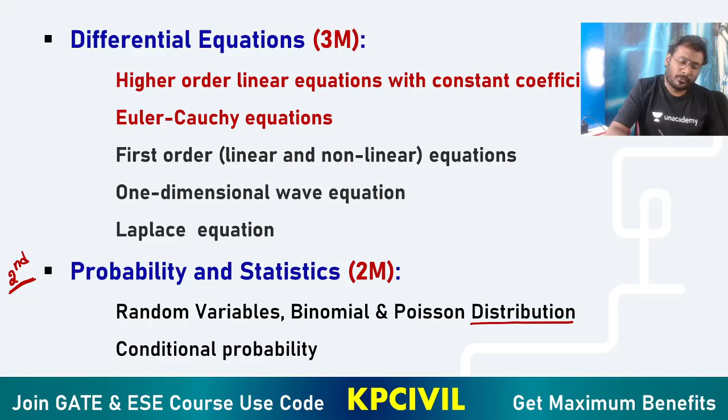Followed by your third priority in mathematics, differential equations. Higher order linear differential equations with constant coefficients, YC and YP determination. Higher order linear differential equation with constant coefficient, YC and YP value determination. Focus more on this.

Euler-Cauchy equation, one-dimensional wave equation, Laplace equation or Laplace transformation. But more priority is given to YC, YP, and then Euler-Cauchy equations. After that, you focus on the remaining topics.

Linear algebra: 1 mark question, 1 two-marks question we are expecting. Systems of linear equations, very important, focus more on systems of linear equations. Eigenvalues and eigenvectors.

Followed by numerical methods, a very small topic, but surely you will get 1 to 2 marks: Newton's and Lagrange polynomials, integration by trapezoidal and Simpson's rule, Euler's method. So this is your fourth priority, linear algebra is fourth priority, numerical methods is your fifth priority. In this order you need to finish.

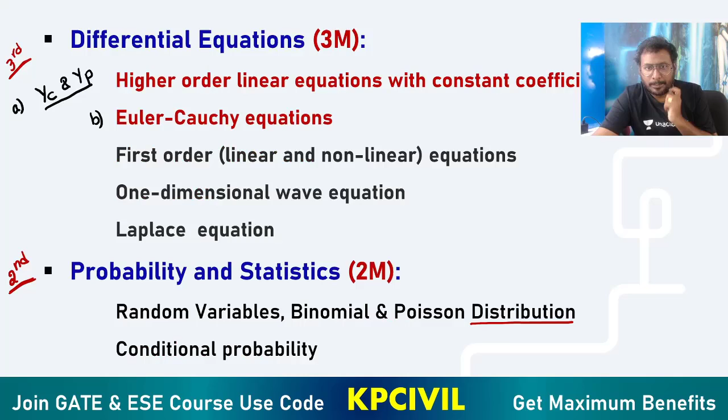Still, if you have time, try to complete 100% of the syllabus of mathematics. Again I am repeating: your first and foremost priority is calculus, followed by probability statistics, then differential equations, linear algebra and numerical methods. If you still find more time to spend on engineering mathematics, finish 100% of the syllabus, no worries, because engineering mathematics is foundation and basic, which helps for the other subjects also, and sometimes they will give questions from it directly. So try to complete the full syllabus of engineering mathematics. Weightage is very high because it is 13 marks.

Okay. Then geotechnical engineering.

Geotechnical engineering, we are expecting 14 to 15 marks, but minimum you will get 12 marks at least. No doubt about it. It's the most preferable core civil engineering subject, without which you are not allowed to write the gate paper, because that much weightage it has. You may write the gate paper without knowing geotechnical engineering, but you'd leave 12 marks. Is it okay to leave 12 marks from such an important subject?

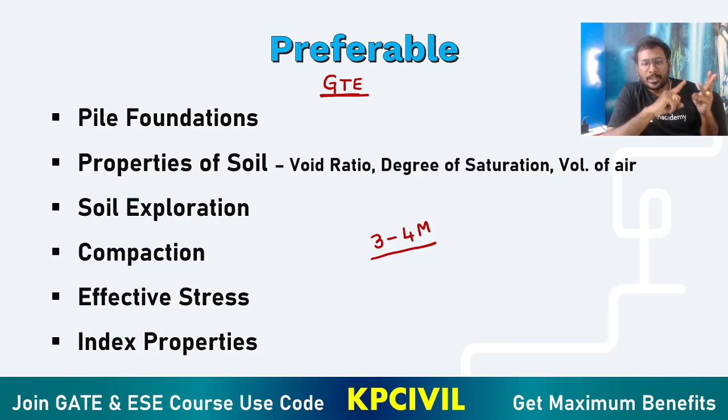From this slide, 3 to 4 marks come from pile foundation, property of soil, soil exploration, compaction, effective stress, index properties.

I want to make your preparation for gate perfect. So for each and every topic related to soil mechanics, I have given their priority here - most preferable, and for the remaining, just go through the outlines. I am saying don't leave anything in geotechnical engineering, soil mechanics - it's very important.

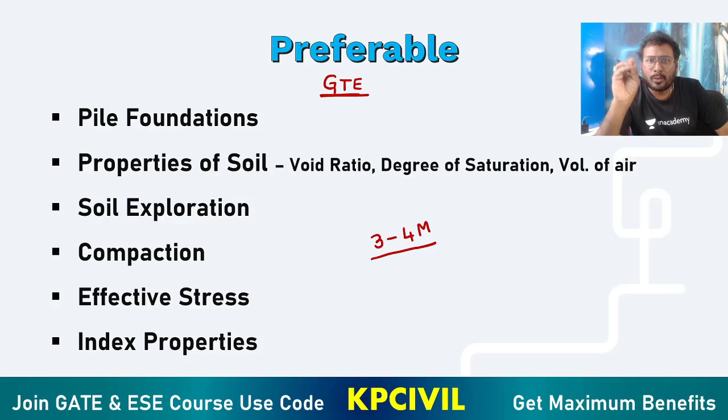But your focus must be more on slide 1, then also focus more on slide 2. For the remaining topics, at least go through them once - learn the important formulas and outlines related to them. Because getting 14 to 15 marks is not an easy task. It is not easy. So according to my analysis of the previous gate papers, I have given the order of priority.

So try to complete the full subject of geotechnical engineering. If that's not possible, at least focus on slide 1 and slide 2.

Environmental engineering - 10 marks minimum. We may expect 11 or 12 marks also, but 10 marks at least will come for sure.

Coming to environmental engineering, air pollution is most preferable. When you observe recent GATE papers from 2011 to 2020, even 2015 to 2020, you get 3 to 4 marks from air pollution. So at least minimum you will get 2 marks - every time one numerical question is mandatory, we are expecting from air pollution.

And regularly, theoretical or numerical questions come from quality of water. Quality of water is very vast - we are teaching 20 to 25 hours on quality of water. What you can focus on: from quality of water, focus on hardness, alkalinity, pH, solids.

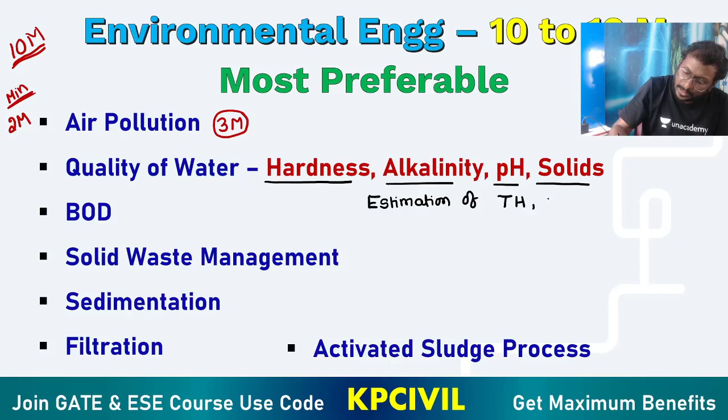You know numerical questions related to estimation of total hardness - write that down, it's very important. Estimation of total hardness, total alkalinity, carbonate hardness, non-carbonate hardness - these are very, very important related to quality of water.

Now coming for BOD. BOD at one temperature and one day is provided, and you have to estimate BOD at another temperature and another day. For example, BOD for 7 days at 25 degrees Celsius is given, and you need to convert it to BOD for 5 days at 20 degrees.

Or they will give you initial DO and the final DO, and you need to estimate 5-day BOD, ultimate BOD, BOD remaining, BOD consumed, like that.

Most important, these 3 topics we focus on more, very very important: air pollution, quality of water, BOD. You must understand these very well.

And this time GATE is conducted by IIT Bombay. When you analyze previous IIT Bombay papers, match the following questions they are giving, so theoretical questions as match the following. You understand the depth of subject they are focusing here - theoretical conceptual knowledge of environmental engineering. You must have conceptual knowledge related to environmental engineering.

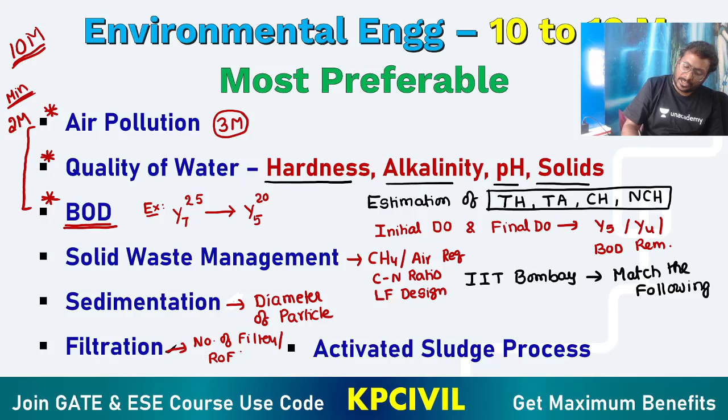Filters - number of filters, focus on determination of number of filters, rate of filtration, filter hydraulics. Focus more on this: number of filters determination, rate of filtration, filter hydraulics - you must focus more.

Okay, activated sludge process theory, mean cell residence time, theta c calculation, food to biomass ratio - very important from activated sludge process.

So by this slide, very important topics, most preferable topics from environmental engineering: air pollution, quality of water, BOD, solid waste management, sedimentation, filtration, activated sludge.

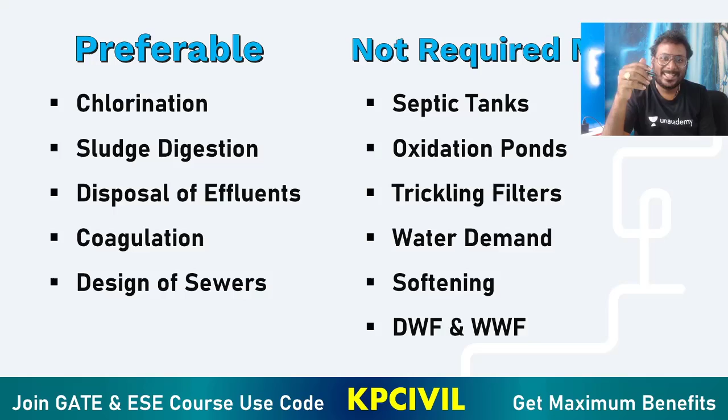Preferable: chlorination. So chlorination will have questions on estimation of bleaching powder, contact period determination, HOCl concentration determination questions, sludge digester, design of sludge digester, effluent disposal, and coagulation - alum quantity, lime quantity measurement, and velocity gradient also.

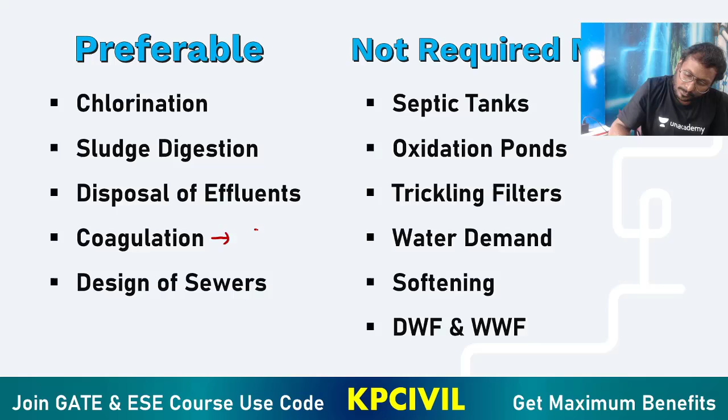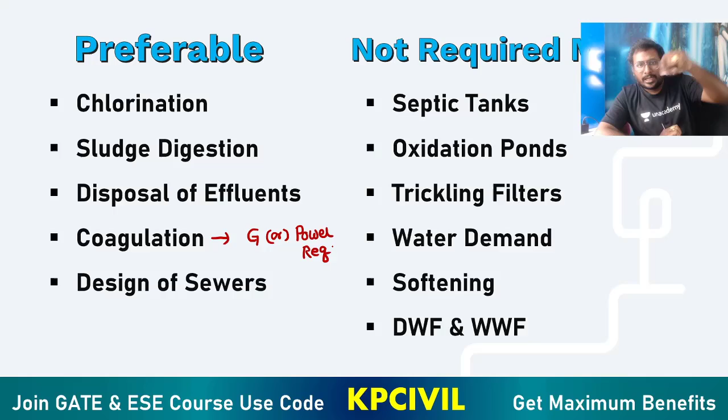G, velocity gradient G, or power required for coagulation unit, power required for mixing operation, diameter of sewer, design of sewer, diameter of sewer needed. All these parameters are important.

Chlorination, bleaching powder estimation, design of sludge digester, effluent BOD calculation, disposal of effluent BOD calculation, velocity gradient determination in coagulation, power input required for coagulation unit, sewer diameter design for design of sewers.

Bluntly I am going to say, no need mostly for these topics what we have written: septic tank design, oxidation pond, trickling filter, water demand, softening, DWF, WWF.

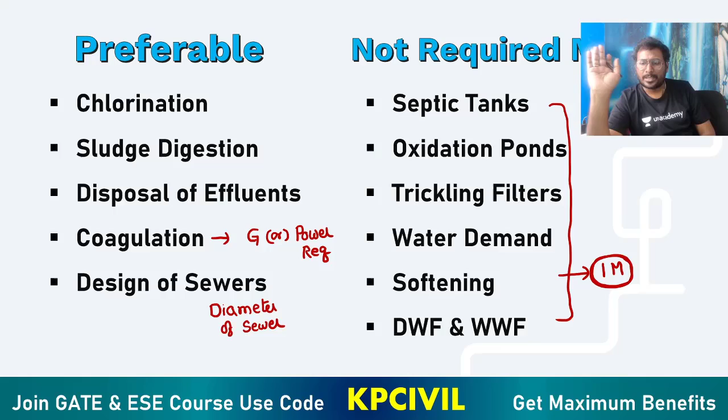If you want 0 to 1 mark, for just 1 mark you are preparing this many topics. Remaining all marks are related to this most preferable and preferable list. So instead of spending that much time on these topics, just leave those topics, no issue. Focus more on most preferable and preferable topics.

Now coming for transportation engineering - 8 marks weightage is given from transportation engineering. Very important in transportation engineering.

SSD, stopping sight distance. In geometric design, the stopping sight distance question is a must, it will come in every paper, very important for you. And horizontal curves - along with that you need to focus on super elevation. In vertical curves you need to focus on summit and valley.

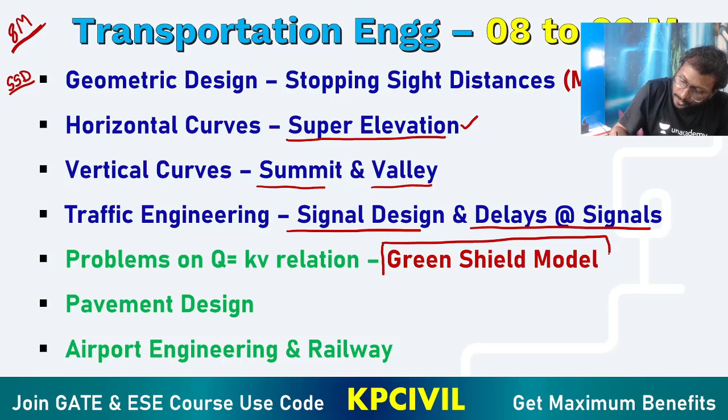Then traffic engineering - signal design and delays at signals, and most important, the Greenshields model. First 4: geometric design, horizontal curves, vertical curves, traffic engineering, and Greenshields model.

If you focus on this, mostly you will get 6 marks. For the remaining 2 marks you focus on pavement design, airport engineering and railways. Clear? Geometric design, horizontal curve, vertical curve, traffic engineering, problems on Q equals KV relation, Greenshields model - 6 marks damn sure you will get. This is as per previous year papers I am saying.

And remaining 2 marks, pavement design - you observe pavement design, you feel you become a good engineer. Airport engineering, railway engineering, tunnel, harbour - the words are attracting more, but weightage in GATE is less. You understand? The words will attract you more, but don't spend more time, because this is a vast syllabus. So don't spend more time just for 2 marks.

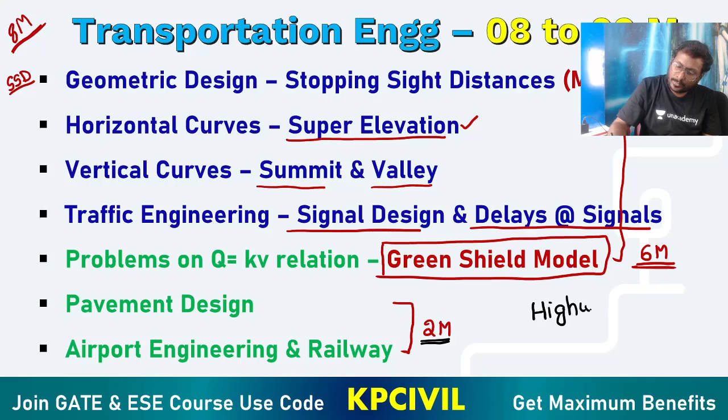So your total focus in transportation engineering, focus more on highway engineering, not on other topics. Spend less time on pavement design, airport, railway, tunnel, harbour. Less time you spend there, but more time you spend on highway engineering.

Then strength of materials. You will have minimum 6 marks, sometimes 7 marks also. Sometimes highest it may give 8 marks, but at least minimum 6 marks it will come. Most of the questions in strength of materials focus more on principal stresses and strains, SFD and BMD, shear force diagram and bending moment diagram. These are mandatory, you will get 3 to 4 marks by reading these 2 topics.

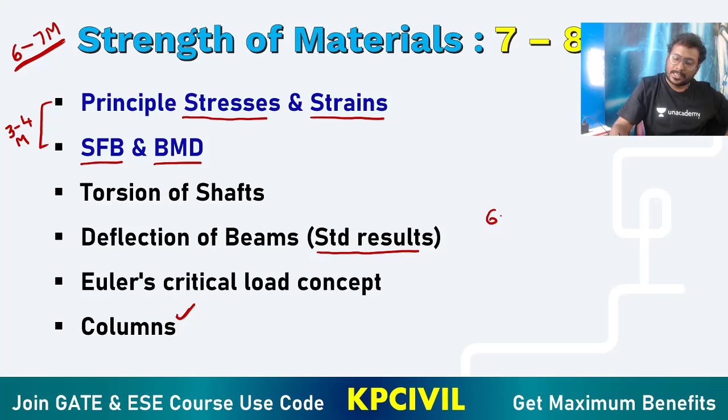Remaining all topics you will get 1 to 2 marks. Mandatory for sure, 5 marks from this slide. That is not by me, this is according to previous question paper analysis.

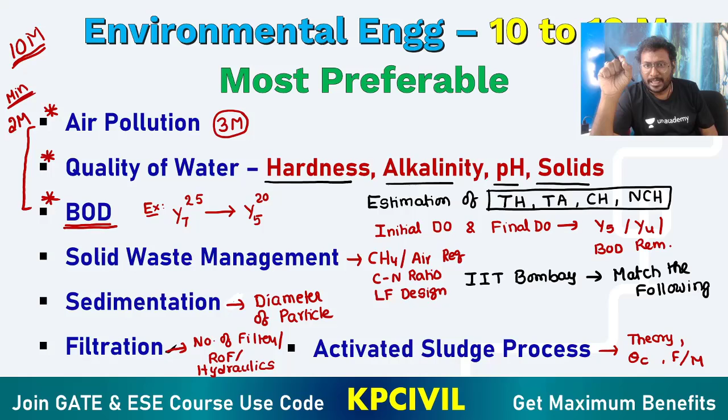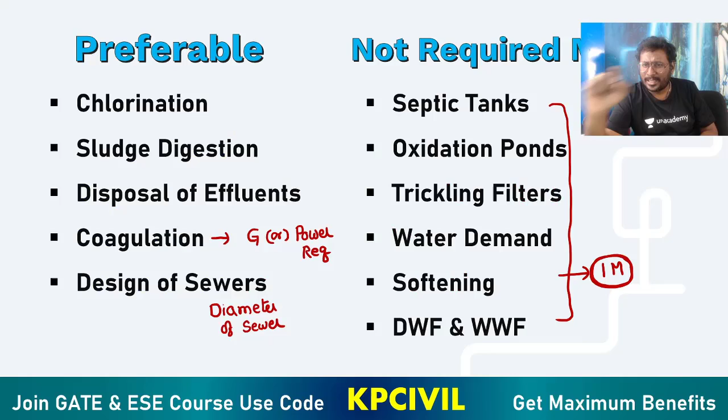Not required mostly topics. Transportation, this slide will give you in total 7 marks. Remaining all 1 mark. This is mostly not required.

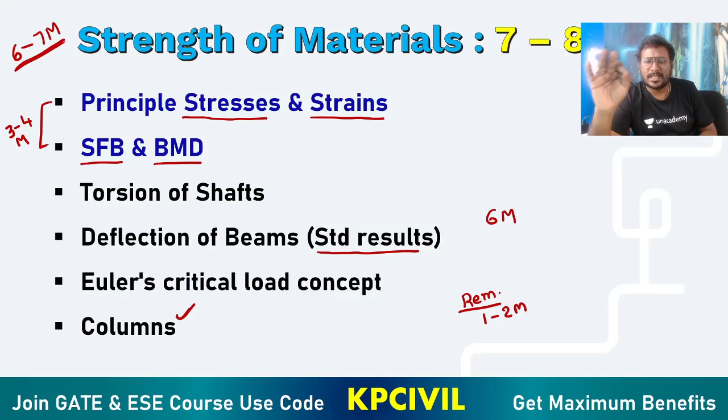Strength of materials, surely this slide will give you 5 marks, 6 marks, remaining 1 to 2 marks only. Same with respect to RCC, 5 marks mandatory from this slide.

Hey, I will challenge you in PUBG. Will you come online to play? No, I have online GATE class, I don't want to miss it. Who is teaching? Top faculty of civil engineering in India, KP sir on Unacademy. I am a big fan of his teachings. Oh yes, I have also heard about KP sir. I am willing to join the class.

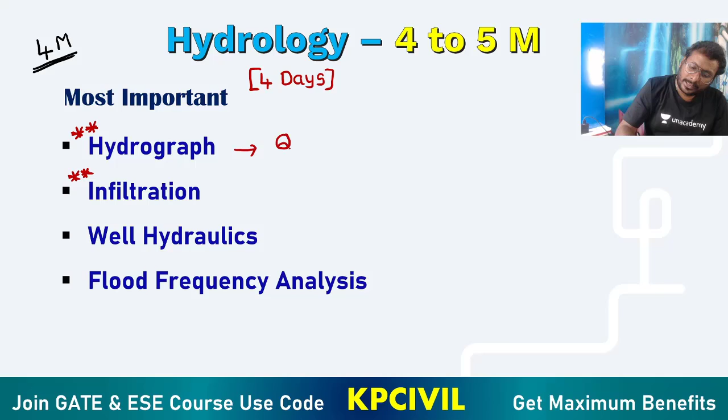Hydrograph, what are you studying? Determination of peak discharge, determination of depth of effective rainfall, determination of catchment area. Mostly your questions are rotating on this - peak discharge, effective rainfall, catchment area determination, infiltration, phi index.

Well hydraulics, discharge or velocity calculation, flood frequency. Mostly you focus on risk associated with the event, probability of occurrence of event at least once, or return period. It is small and simple.

Total you are having 25 to 30 formulas in hydrology. By learning these 25 to 30 formulas, you will get easily 4 marks. Very small and simple subject.

But understanding the concept is needed to solve questions on hydrograph and infiltration. Here in infiltration, you can add Horton's equation also.

Concept-oriented learning is very important for hydrology. That will beat any question related to hydrograph and infiltration. If you understand the concept well, easily you can solve the question.

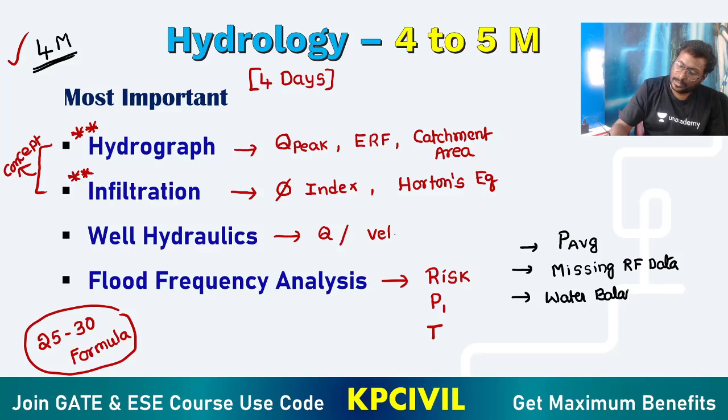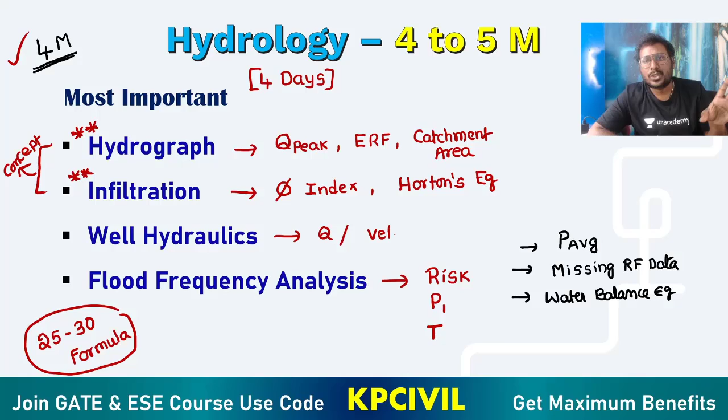So mostly this is enough. Just spend 4 days, you will get 4 marks, no doubt about it. Easy and simple subject. If you learn the theoretical concept, easily you can answer all questions. More days, more time not required.

I have written formulas required in remaining topics - Thiessen polygon method, isohyetal method, normal ratio method, water balance, energy balance. This is regarding average precipitation.

This is about missing rainfall information, normal ratio method. This is completely related to evaporation, potential evapotranspiration, rational formula. Everyone knows it, right? Rational method, AIR by 360.

Muskingum method of flood routing - these are additional. Other than the 4 topics - hydrograph, infiltration, well hydraulics, flood frequency analysis - additionally you learn 7 formulas, just 7 equations, enough. Easily you solve hydrology.

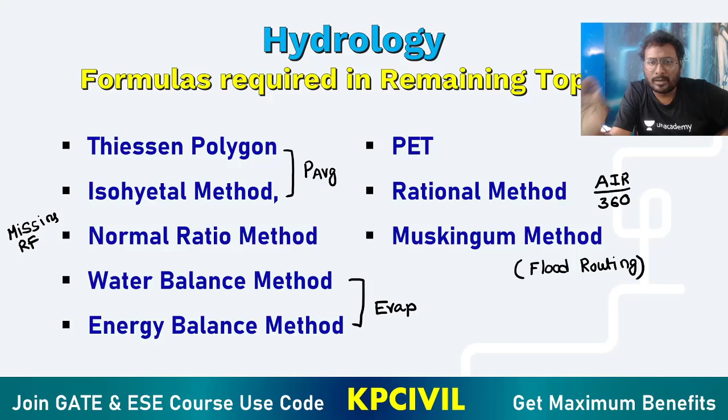Open channel flow. According to me, to prepare open channel flow, you spend 2 days. That is enough, just 2 days you learn it.

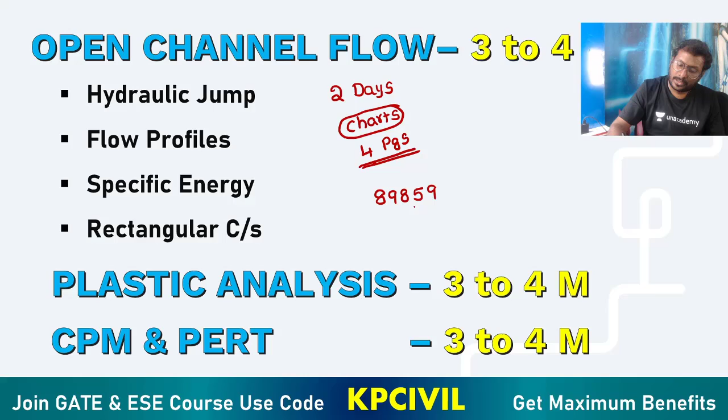89859 3112. I made a simple chart preparation for OCF to simplify it. Mostly questions are from the formulas in the charts, which include hydraulic jump, flow profiles M1, M2, M3, S1, S2, S3, flow profiles, mild slope, steeply sloping surface, specific energy - most important concept in open channel flow.

In channel geometry, we study all channel geometry, but more focus is on rectangular cross section. Along with the jump, you also study regarding surges. Your focus is topic 1 hydraulic jump, topic 2 specific energy, topic 3 flow profiles, topic 4 rectangular cross section. Most of the questions relate to these 4 only.

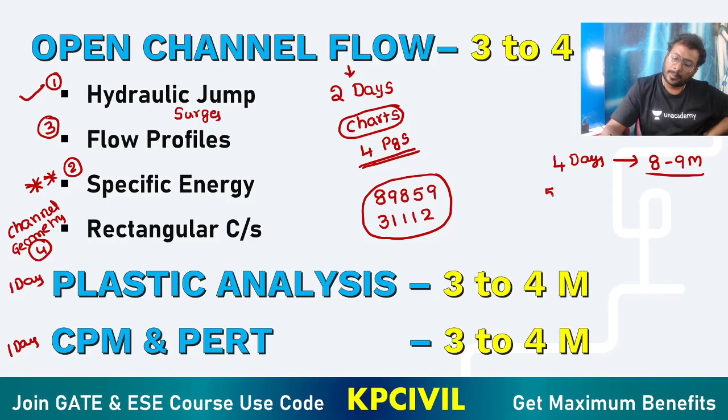Open channel flow, plastic analysis, CPM and PERT - 4 days you are spending. Take 1 more day, no problem, 5 days, no problem. For sure 8 marks you will get. Guarantee, 8 marks you will get.

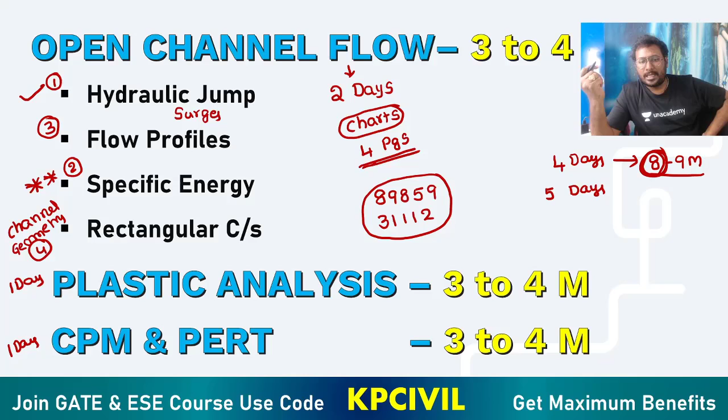Open channel flow 3 marks, plastic analysis 2 marks, CPM PERT 2 marks - 7 marks mandatory will come, no doubt. Simple and easy subjects, easily you learn it. So in CPM, what are you learning?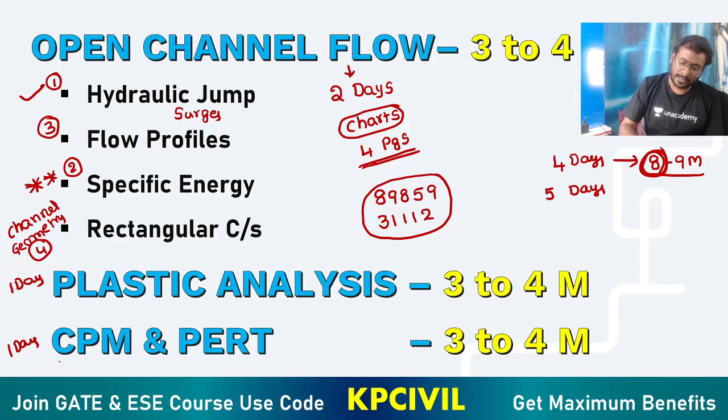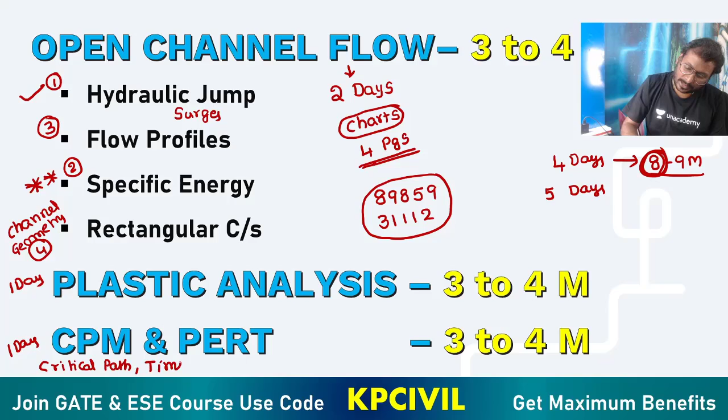Critical path. What is critical path? Time required to complete project, float and slack - these are mostly focused in CPM. Total cost, project total time, critical time, crashing - you have to learn these.

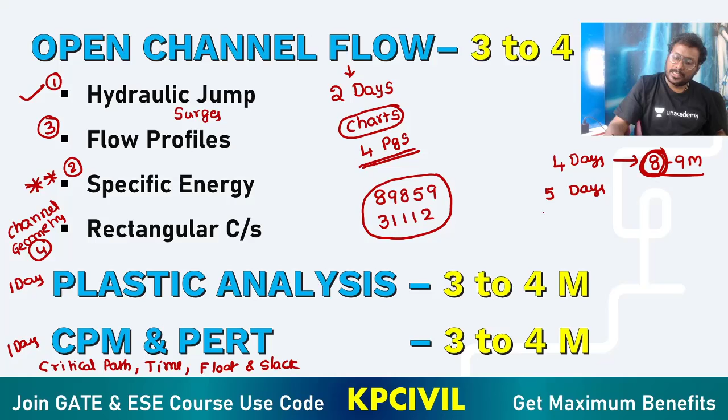Easily you get that. In how many days? Just 5 days, 8 marks. 4 days, 4 marks. So these are small subjects. Surveying - I am giving again 4 days for surveying. Overall, 15 days you are spending.

Hydrology, open channel flow, plastic analysis, CPM part, surveying - 5 subjects, 15 days you are spending. Around 17 to 18 marks you will get within 15 days. See how effectively you are preparing.

Short time, 15 days you are getting 15 marks. Take 15 marks. Every day 1 mark you will get in GATE exam. Very easy na. Coming for surveying.

Focus more and more on traverse surveying, leveling, photogrammetry, elementary height determination, then followed by compass survey and traversing. Here, first focus on traverse surveying, then leveling, then photogrammetry. Along with that, you focus on compass survey.

Errors, you focus also more on error determination. You will get 4 marks minimum from surveying, sometimes 7 marks also. So within this 15 days, you are getting 5 subjects, 17 to 18 marks.

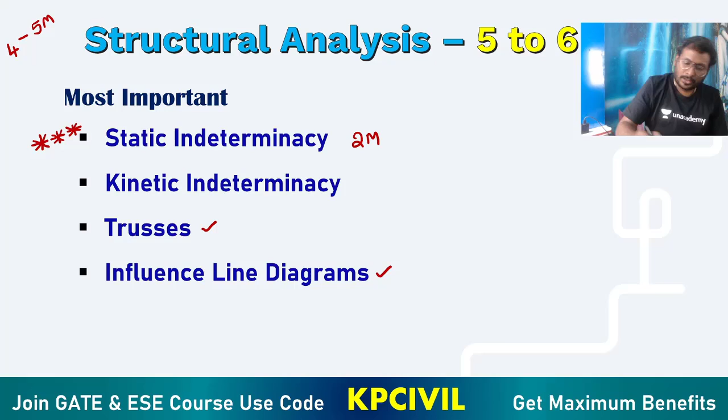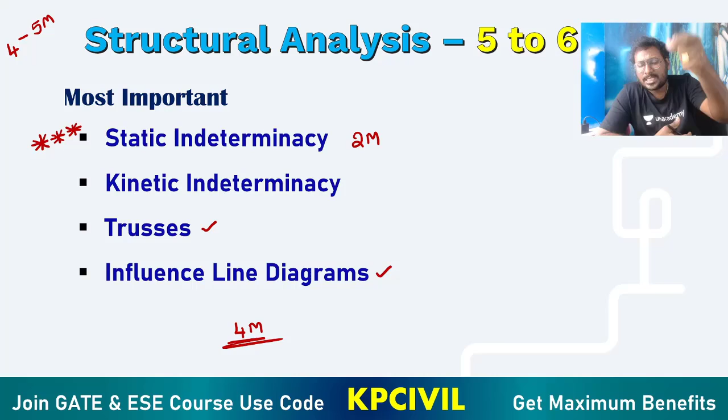Followed by trusses, followed by influence line diagrams. Very important structural analysis topics. If you read these 4 topics, you will get 4 marks. But this is time consuming, so in your preparation, put it in the last stages of preparation, you go for it.

Then fluid mechanics. Already we have taken out open channel flow. After excluding open channel flow, 5 to 6 marks. Fluid dynamics, kinematics, dimensionless analysis, flow through pipes, laminar flow and turbulent flow, hydrostatics - these 3 you will get 4 marks.

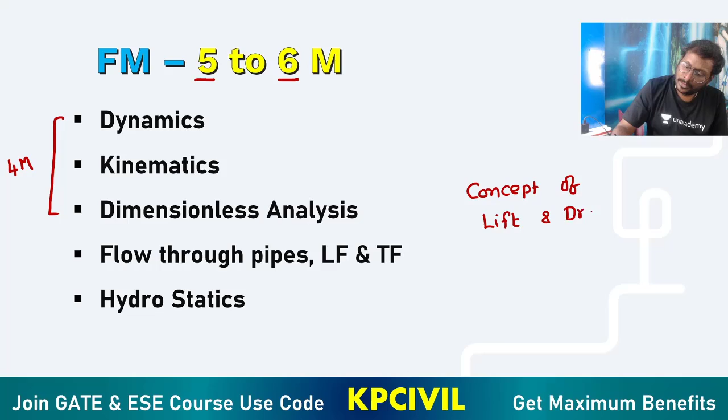Recently added, concept of lift and drag. IIT Bombay added this topic, specially written this topic. So we are expecting one question from this concept of lift and drag.

Flow through pipes, very important. Then the remaining topics you just go through outlines. More and more focus on dynamics, kinematics, dimensionless analysis, flow through pipes. Then concept of lift and drag. After that, laminar flow, turbulent flow, hydrostatics, fluid properties. Because already OCF taken out, 5 to 6 marks I have given.

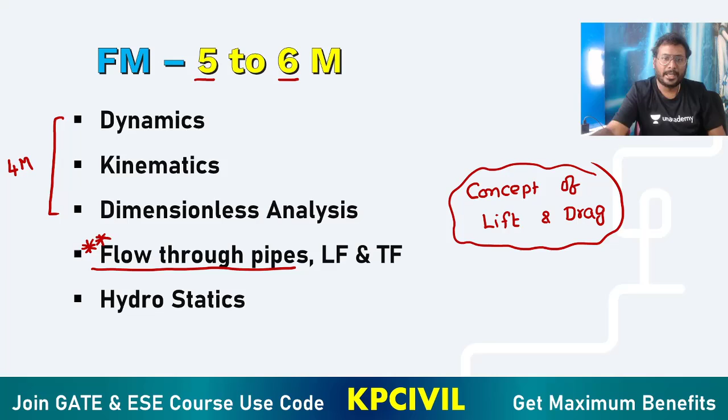Prepared last, least preferred subjects - irrigation. According to recent gate weightage, 1 to 2 marks. Duty delta base period, field capacity, permanent wilting point.

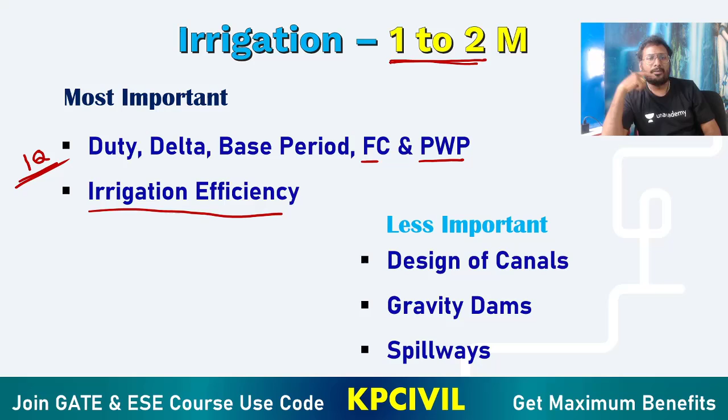Irrigation efficiency - if they want to prefer, they want to give one question, first preferred question is from these topics only: duty, delta base period, field capacity, permanent wilting point, irrigation efficiency. Then they focus more on gravity dams, then focus more on spillways.

But I would like to reveal one thing - every time when IIT Bombay has conducted GATE exam, they are giving 2 to 3 marks, and especially when you consider 2005, high weightage given, 6 to 7 marks given for irrigation. So we can't predict this year what IIT Bombay going to do.

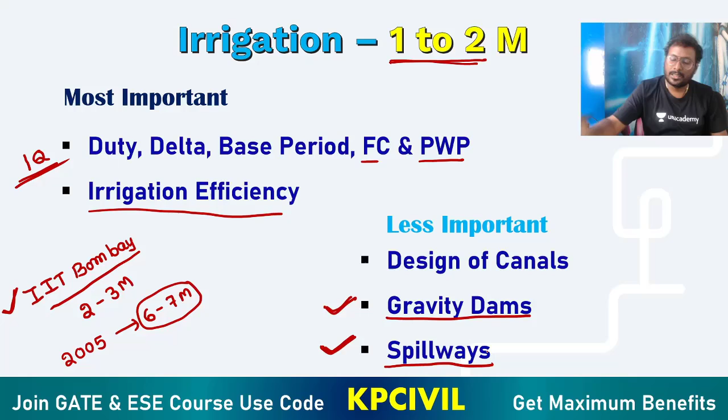So these are small and simple topics only. If you have time, spend time on gravity dams and spillways, because we expect more questions on gravity dams and spillways. Okay. Steel structures - already you've taken out plastic analysis.

Steel code is important. Code is very much important. Don't spend more time, spend less time only, because after taking out plastic analysis you are having 2 marks. More focus on connections - riveted, bolted, welded connections, tension and compression.

Latestly they are giving questions on tension and compression members, and also they are focusing on concentric eccentric connections. Recently, but the weightage does not exceed more than 3-4 marks, because already we taken out plastic analysis now. So code learning, IS code is very important for steel structures. Then focus on remaining.

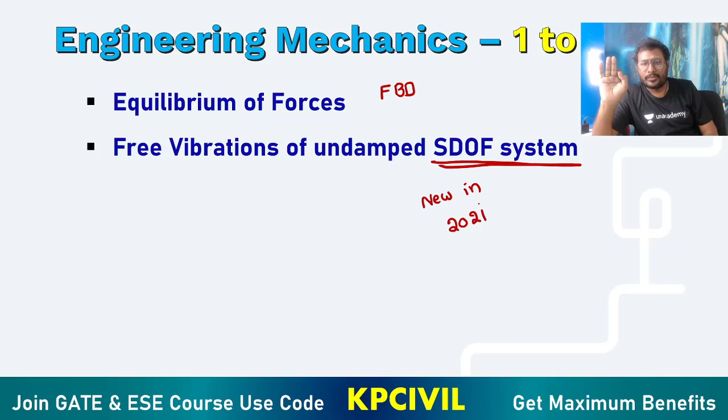Engineering mechanics - learning determining free body diagram, FBD. Then recently latest added topic, new in GATE 2021: free vibrations of undamped SDOF system. Very important - equilibrium of forces, drawing free body diagram, and then free vibrations on undamped SDOF system.

New topic added in 2021, but weightage is less, so spend less time. Spend your less time. So according to me, I would like to conclude one thing here.

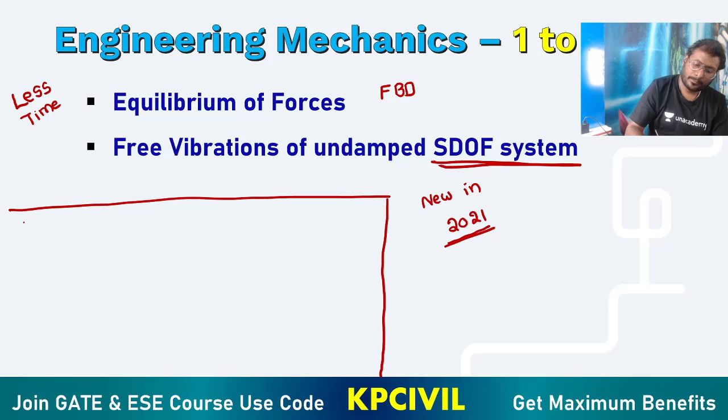You spend your time effectively, more and more time on subjects. Again and again I am saying: mathematics, aptitude, geotechnical engineering, environmental engineering. After this, transportation, RCC, strength of materials.

Less time you can focus on these. Even though subjects sound good, you need to spend less time: FM, structural analysis, steel, engineering mechanics. Optimum time exactly needed, don't go very high time, don't go very less time.

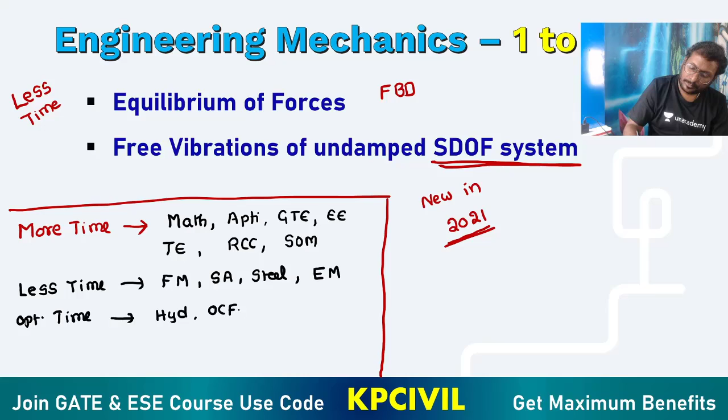Hydrology, OCF, CPM and PERT, CMM, plastic analysis, irrigation, surveying also. Give optimum time to these, then your preparation will go very good.

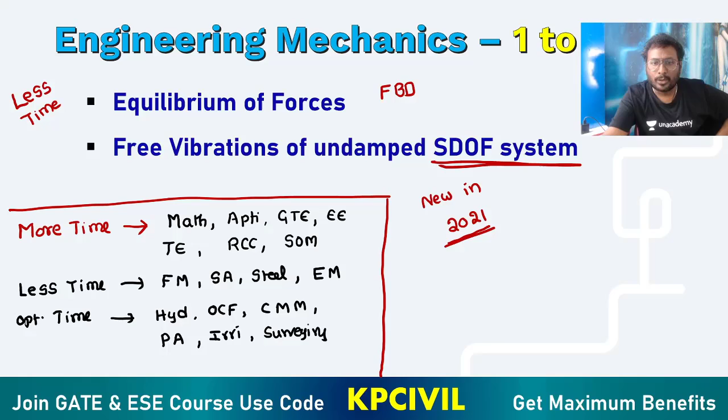Finally, I would like to conclude: don't study to earn, study to learn. Learn deep subject, in-depth subject knowledge. What you learn today is what you will become tomorrow. Today, how much effectively you are preparing the in-depth subject knowledge, learning good subjects, that only will give you your future.

Subject will not go away from you. You earn money, it may go today, tomorrow, day after tomorrow. But you learn a subject, that subject will be with you forever, lifelong with you. That subject knowledge only will give you job, future, career and life. Remember, study to learn, not to earn.